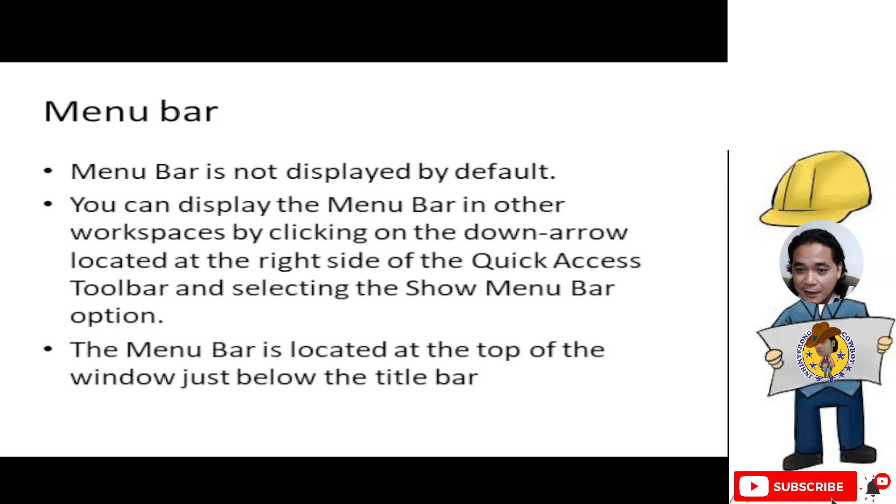Okay, so this is part 3 sa ating learning, sa AutoCAD guys. So last time sa part 2 natapos tayo sa menu bar. So ito, menu bar. So yung next natin is yung changing the display of the ribbon.

Okay, so yung ribbon na sinasabi dito, kung titingnan natin yung ating AutoCAD software, ito siya. Okay, so ito yung ribbon. So this one, home, insert, annotate, parametric, view, manage. So ito siya. Okay, so actually pwede natin itong i-change.

I-change yung kanyang display kung gusto mong malaki yung ating screen. So pwede natin itong ibaba doon. So ito is naka-ribbon minimize to panels. Okay, so kung gusto mong gawing minimize to panel titles, i-click mo lang ito. Okay, so kung nakikita nyo, may wordings na nag-appear, minimize to panel button. So i-click lang ito.

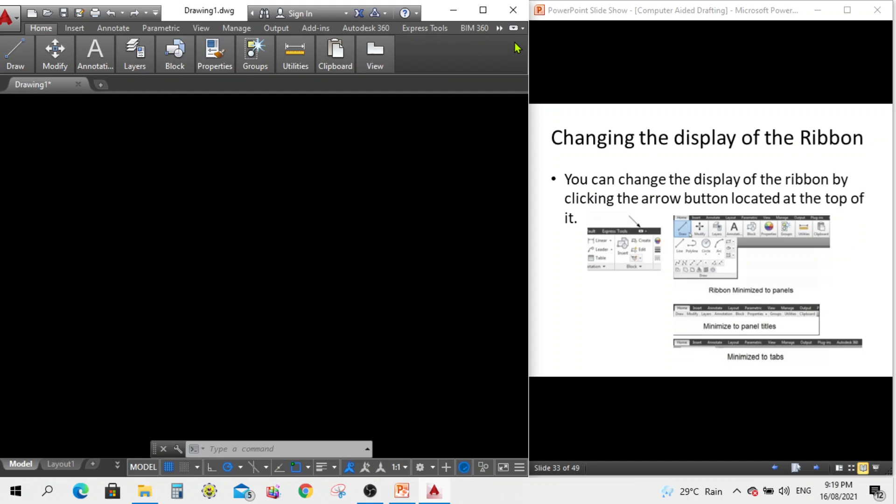So magiging ganyan siya guys. So panel na lang yung ating makikita. So pwede na din natin i-show full ribbon. Okay, or gawin natin sa tab. So meron siyang minimize to tabs. Okay, so magiging ganyan siya. So naka-minimize to tabs na ito. So ulitin natin, minimize to tabs. Then panel titles, this one.

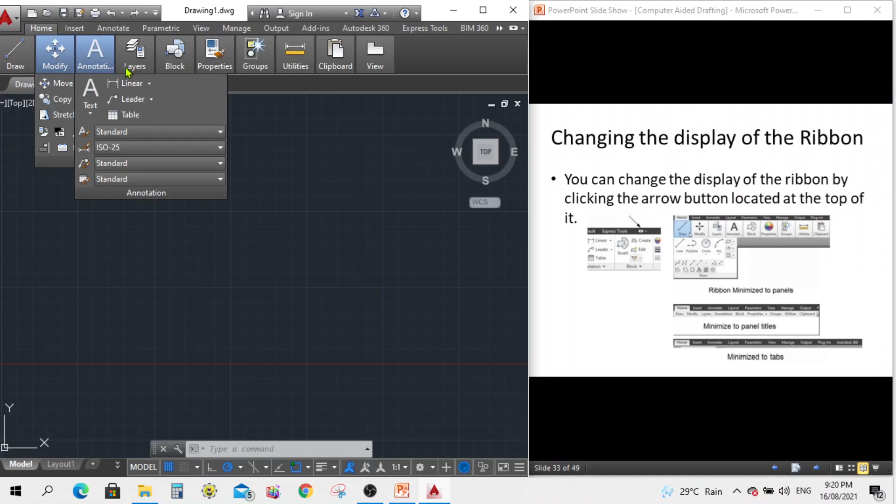Ito yung panel titles, kung makikita nyo, lumalabas ito yung draw, modify, annotation, layers, block. Then most na ginagamit natin is panel buttons. Okay, so nag-appear itong draw, itong modify annotation, layers. Okay, so siguro mas convenient pag ganito, kasi bago pa lang tayo sa software, pero kung expert na tayo, pwede natin i-minimize to tabs. Okay, so I think na-explain ko ng detailed itong changing the display of the ribbon.

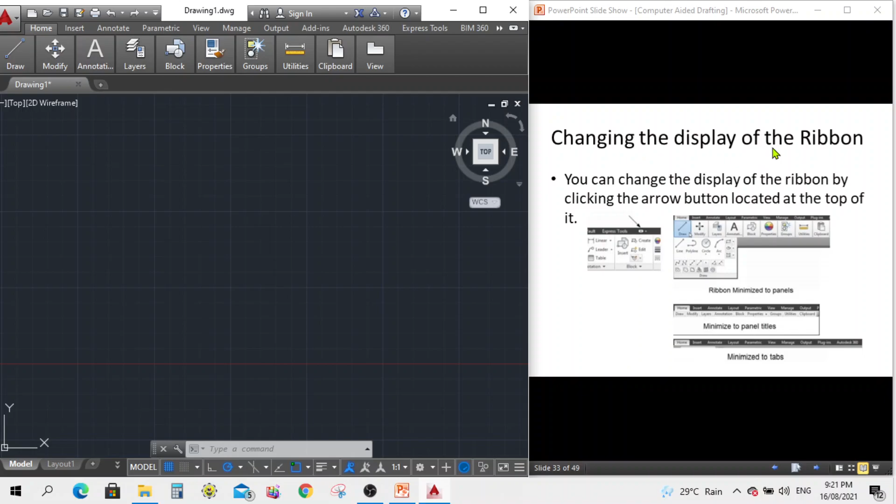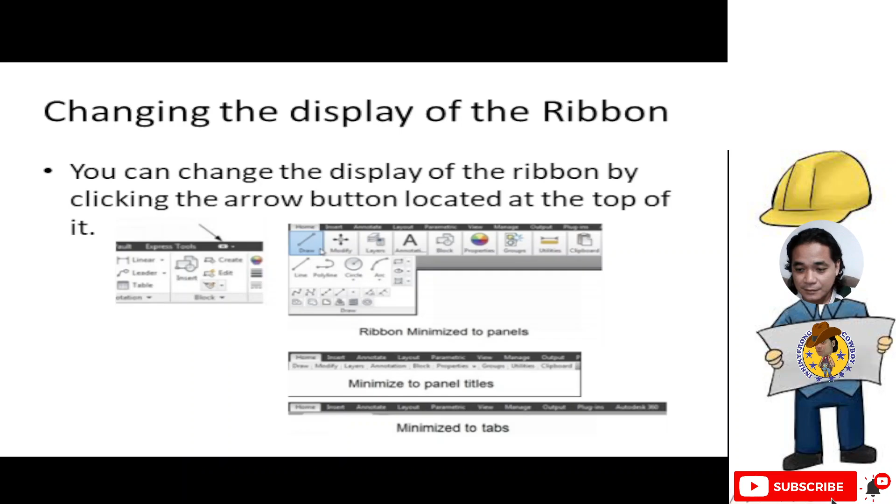Okay, so balik tayo. Okay, so yung next guys is yung dialogues and palettes. Dialogues and palettes are part of AutoCAD user interface. Using a dialog or a palette, you can easily specify many settings and options at a time.

Okay, so ang next guys is yung tool palettes. Tool palettes provide you with another way of selecting tools and placing objects. Tool palettes is parang direct ito, so may mga options na doon o icons na pwede mong i-drag para i-insert sa drawing. So you can display tool palettes by clicking view.

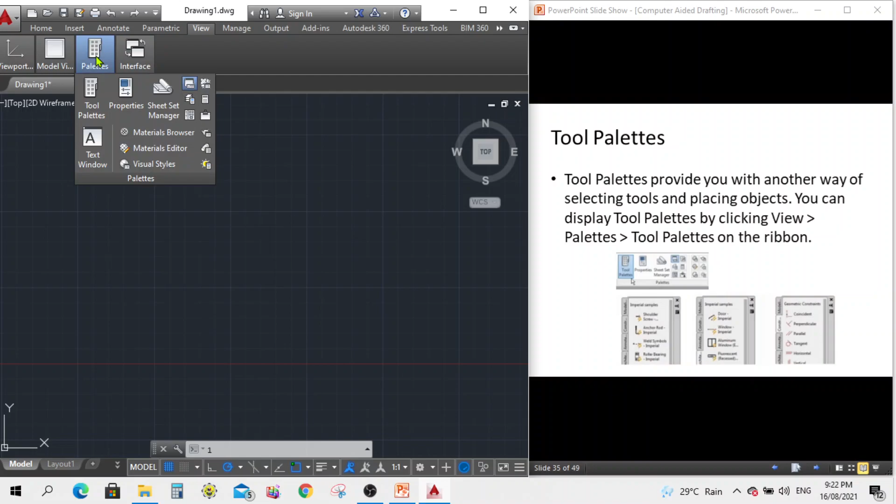So nasa view siya, palettes and tool palettes on the ribbon. Okay, so tingnan natin. Okay, so ito siya. So view. I-click natin ang view. Then palettes, so ito. Then tool palette, so dito. Pag click natin to, lalabas itong mga ganito guys.

So mayroong modeling, constraints, annotation, architectural, mechanical, electrical, civil, structural, hatches, table. So nandito lahat. So para mas medyo mabilis yung drawing, pwede natin gamitin tong tool palettes. Okay, so maraming techniques sa AutoCAD guys. So depende sa kung saan ka convenient.

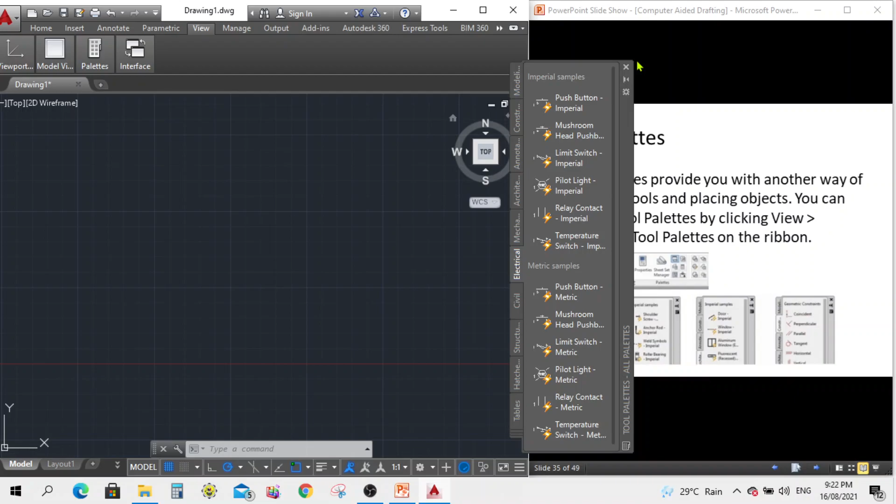Okay. So balik tayo. Okay, so siguro mga 95% matatapos na natin yung learning 1 guys sa ating learning session. So ito yung ating mga command list.

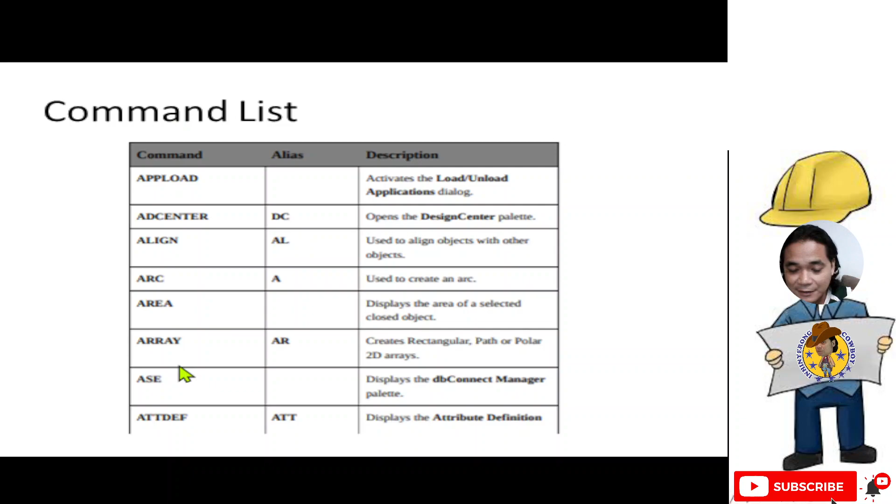Okay, itong command list guys, ito yung ating tinatype sa command. Okay, so ito yung ating command. Okay, so kung ito yung ating workspace, so dito natin siya ito-type. Example, DC. So for this one, yung APPLOAD wala siyang alias eh. So activates the load/unload applications dialog box.

So pag ADCENTER ka, ta-type mo siya dito, DC. So lalabas siya. Okay, so ADCENTER. So i-click mo na lang to or enter. So mag-upper na yung command na gusto mo.

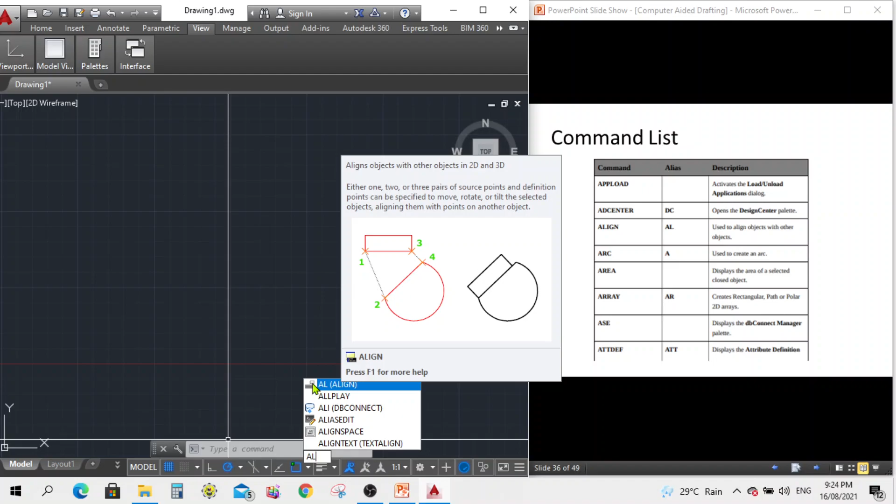Okay, so next is align. Okay, so try natin yung align. Align is AL. Okay, so lalabas siya. Okay, so siya yung mauuna. So align. Ang ibig sabihin ng align is used to align objects with other objects. Tsaka may mag-upper dito guys na kuhan, parang instruction ito. So align objects with other objects, 2D and 3D. Okay, so very helpful siya and very convenient.

Okay, so next is yung arc. So ganun rin, na-type mo rin dito. So ang importante nito guys is yung alias ng command, alam mo o memorize o familiar mo ito sa'yo.

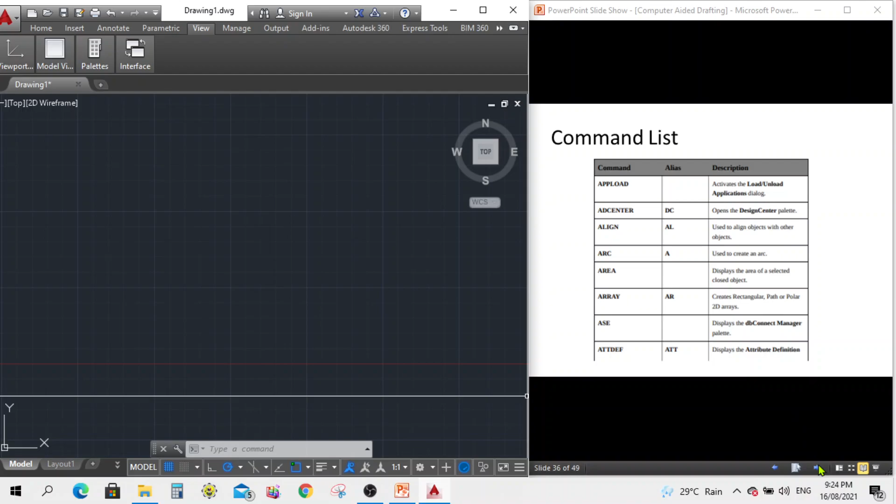Okay, ASE displays dbConnect Manager palette. Okay, so ATTDEF is display attribute definition. Next is the ATTEDIT or ATE, ito yung kanyang alias, used to edit attributes. Audit, used to check and fix errors.

Auto-constrain, used to apply constraints automatically. Auto-publish, used to create DWF file. Okay, so B action or AC used to add action to a dynamic block. This command is available in block editor. So naka-block editor ka guys, magagamit mo siya.

Okay, so block used to create a block. Bmake used to create a block. So B, then BMPOUT used to create a raster image out of the drawing. Boundary or BO, yung kanyang alias, used to create hatch boundary. Break used to break an object.

Okay, Cal used to calculate mathematical expressions. Chamfer, CHA, used to create chamfers. Okay, so CH changes the properties of selected objects. Circle, C, used to create a circle. Okay, so kung nasa drawing tayo, so palagi natin ito nagagamit.

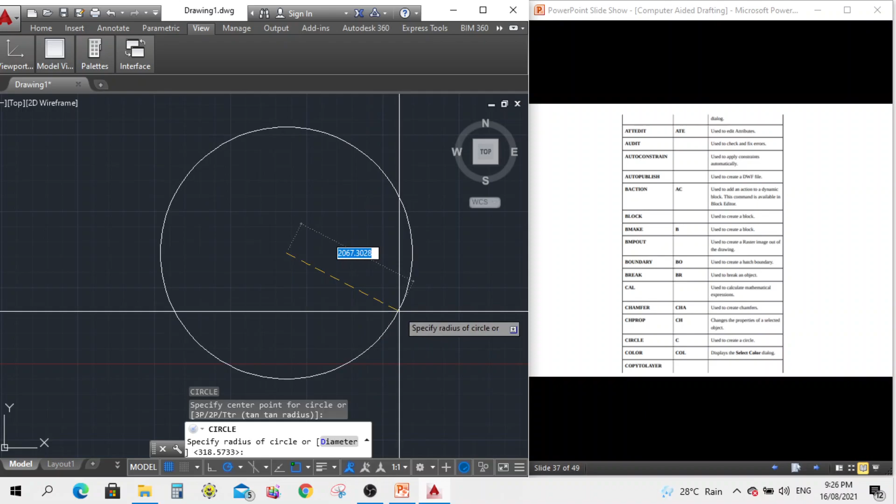So mabilis siya. So dapat alam mo kung ano yung mga alias niya. So type mo lang sa command dito. Example, yung circle C, enter. Okay, so makagawa ka na ng circle. So i-specify mo lang yung kanyang radius or diameter.

Okay, so next is color or COL, display the select color dialog box.

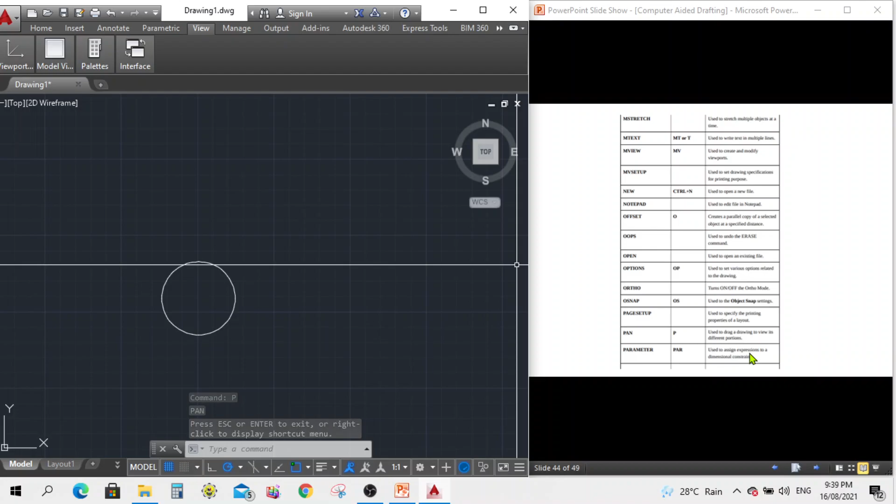Parameter or PAR is used to assign expressions to dimensional constraints. Also pbrush, pedit or PE, pline, polyline.

Plot, for printing, is Control P. Point, PO, is used to place a point in the object or drawing. Also polygon or POL, preview or PRA, properties or PR which displays the properties palette, purge or PU, QDIM, QSave, quick.

Quick calculations or QC, quit, and ray.

We also have recover all, rectangular, redefine, redraw or R, undefine, redo, redrawal or RA, region all, region, rename, and revcloud.

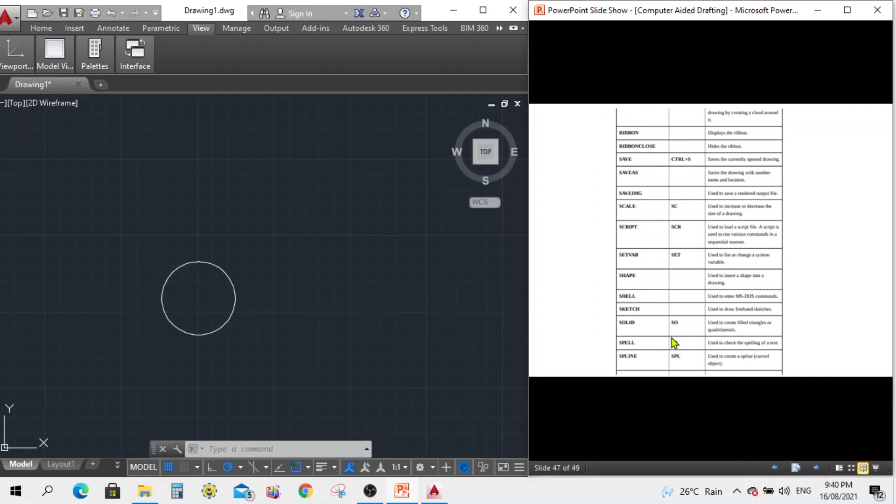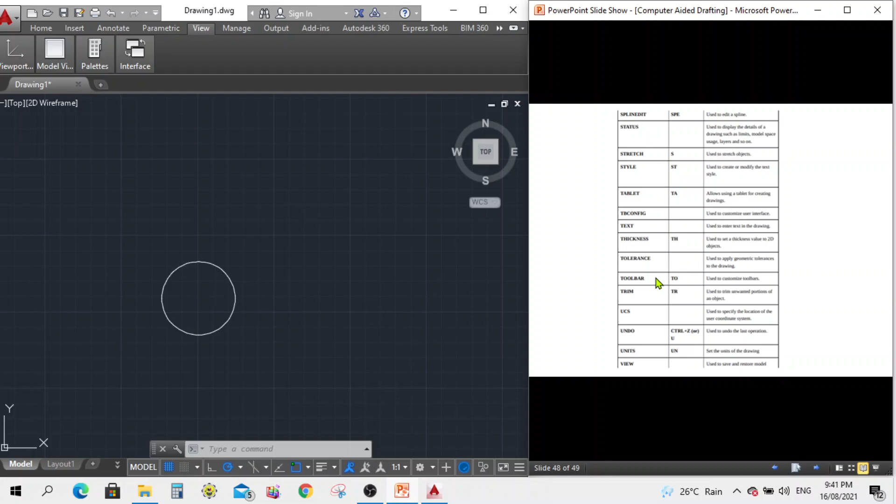Status, stretch, style or ST, tablet TA, table configuration, text, thickness, tolerance, toolbar TO, and trim or TR.

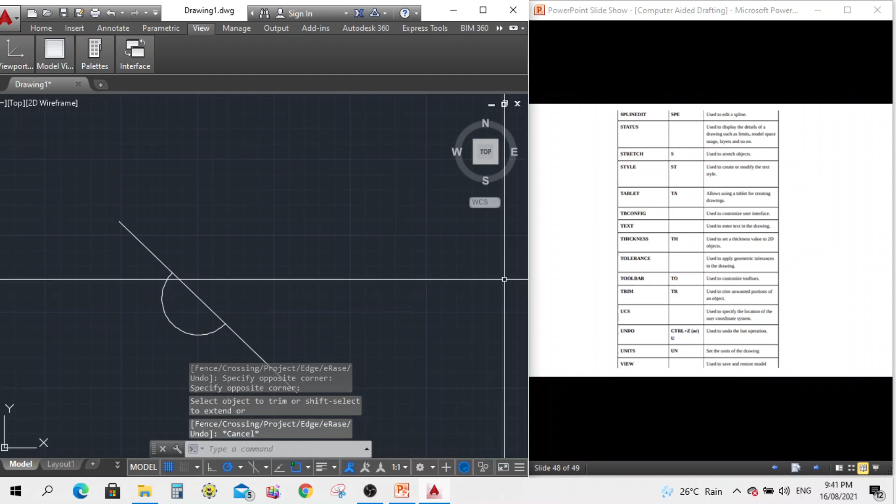UCS, undo, units or UN, and view.

Lastly, for our commands, we have vplayer, vports, vslide, wblock, WMFIN, wipeout, WMFOPTS, WMFOUT, Xattach, Xline, Xref, and zoom.

So these are the command lists we should familiarize ourselves with while drawing our projects in AutoCAD, because these commands make our drawings easier since we just type them in.